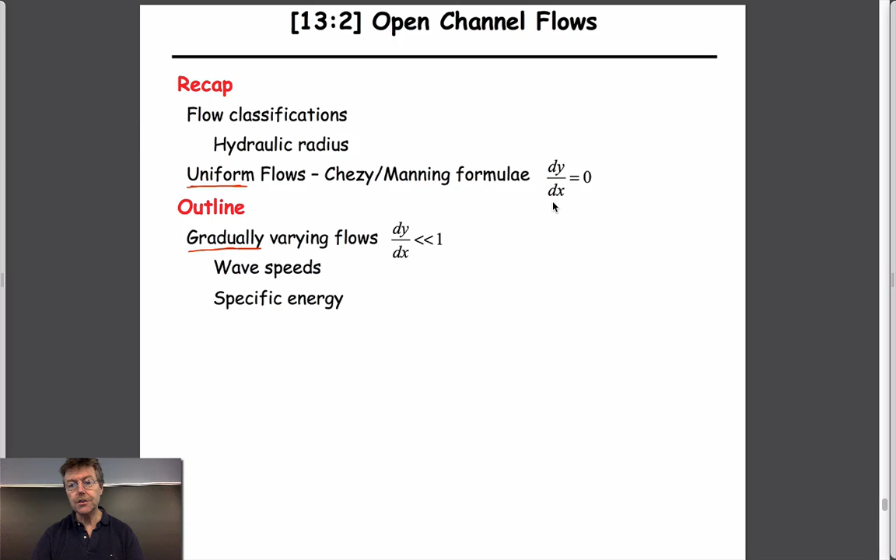And so just to summarize from last time, when we developed our behavior for uniform flows, by definition, the definition of a uniform flow is that the depth doesn't change as you go from upstream to downstream. And so we used this figure specifically to explain what was going on, and that is that if the flow is uniform, then the depth of the flow, by definition, upstream and downstream, is the same. If the depth of flow upstream and downstream is the same, then the velocity of the flow at each of these points has to be the same as well.

And so in terms of the slope of the bed, the hydraulic grade line, which is the surface of the water, and the energy grade line, which is the slope of the water plus the v squared over 2g term, they all have to be parallel to each other by definition. So this is parallel to this, which is parallel to this. And in that condition, the important consideration is that we can basically draw a box where if this is length 1 and this is S0, this is the slope by definition.

And if we go directly above like this, then if we draw this horizontal, and this is SF, and this is 1 also by length, then it means that this is the viscous loss, the energy that's being expended in the system.

Just like we can write Bernoulli between upstream and downstream, this is really Bernoulli written between upstream and downstream. This is our term which would be our equivalent for the HL term. Actually, I suppose in some respects, this is kind of equivalent to the HP term. I never actually thought about it that way, but it is.

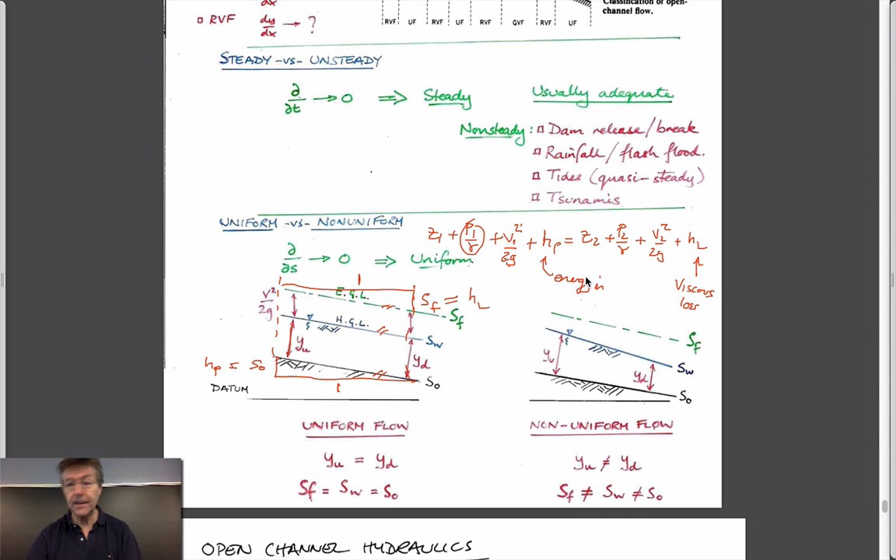This is the energy in, or maybe it's the energy rate in. And so the energy in is provided, this is basically the equivalent of S0, and this is the equivalent of SF.

So if this energy grade line was horizontal, which it can't be for the reasons we've said, then there'd be no viscous loss in the system.

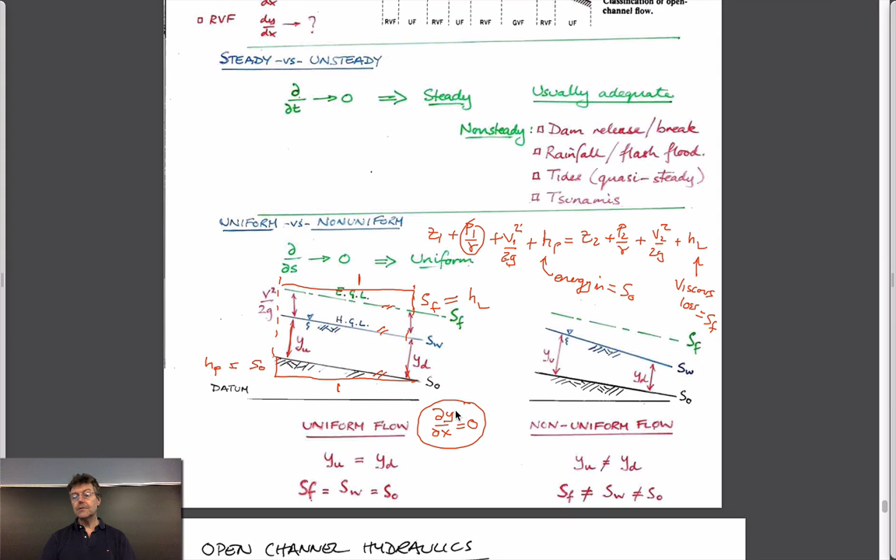So by definition, for uniform flows, where in a mathematical sense the change in depth as you go downstream is 0, that's all this term means, this is just a fancy way of saying that, then as a consequence of that we get out of it the Chézy equation or the Manning equation, which I'll just zip up in a second and write down for us.

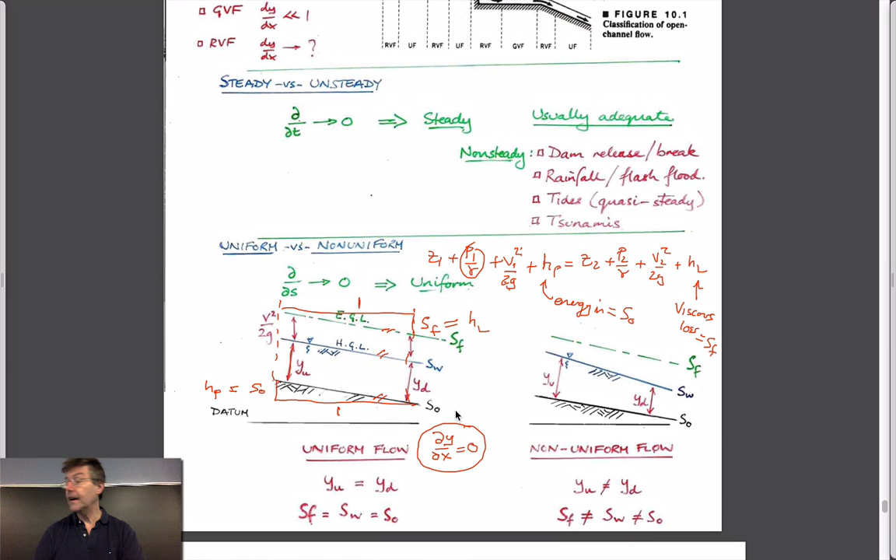And that allows us to calculate what the flow rates are within channels. And so I'll zip up.

And so if we have a channel that has some cross-section, don't know how well I can draw this. I can certainly draw it fine on its side.

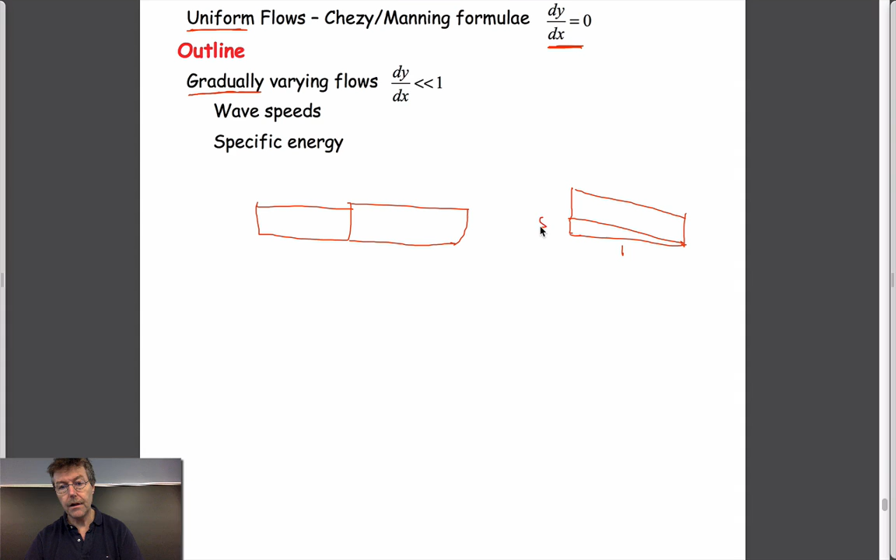And that channel has a slope S0, and it has depth y. And this is my perspective drawing of this. This is area. This is wetted perimeter, which we've drawn here.

Then we can always get the flow velocity in this as a function of this constant, which depends on, it's equal to 1 for SI. I think it's equal to 1.49 for feet per second versus meters per second. The Manning coefficient multiplied by hydraulic radius, I think to the 2/3, and multiplied by the slope of the bed to the half.

And if you want to get the volumetric flow, you just multiply the average velocity by the cross-sectional area. So hydraulic radius is equal to area over perimeter, and slope is just unitless, right? It's this length divided by 1, whatever that is.

And so typically these are very small numbers, fractions, less than 0.1, less than 0.01, less than 1 in 100. And so we rationalized this last time when we looked at the comparison, if you like, between our graphs for Reynolds number.

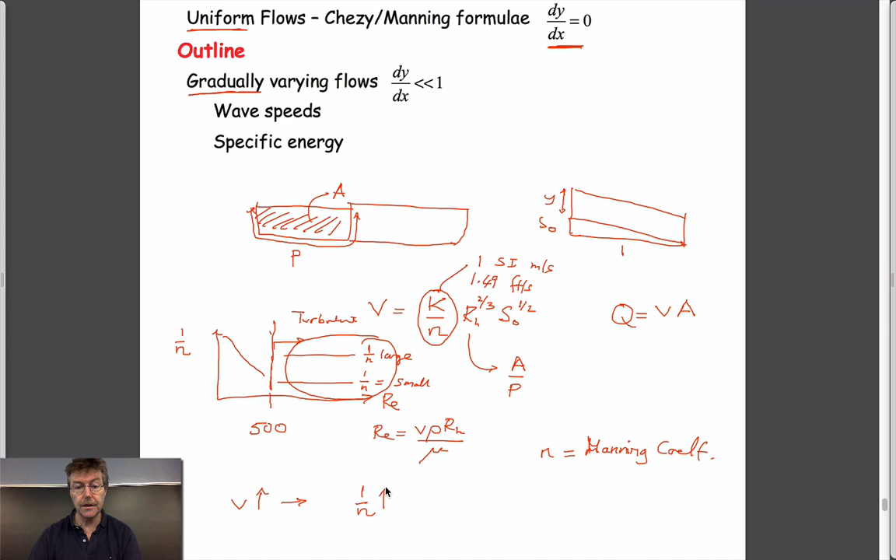So if you want velocity to be large, then what do you need to do? You either have 1 over the Manning coefficient be a big number, you have a hydraulic radius that is large, or you have a slope that is large. You can do any of those things to increase flow. Those are the design things you could do to change it.

So instead of using a rough material, you could line the channel with concrete forms to make it nice and smooth, and therefore make this number large. You could increase the slope of it, maybe, if that's within your constraints to be able to do that, and you could make it increase.

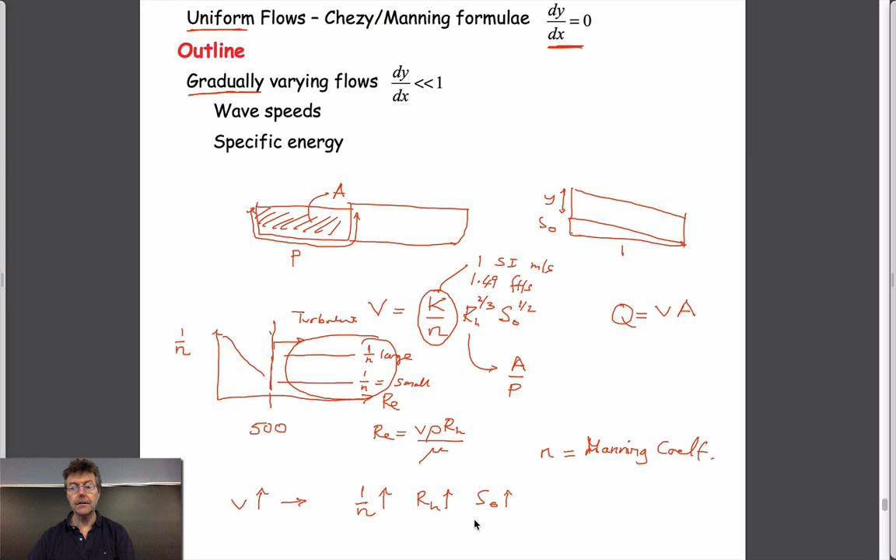Or you could change the hydraulic radius, which is equal to the area over the perimeter - you could increase the area relative to the perimeter, in other words make it a more efficient section. You can actually do calculations to figure out what the most efficient sections would be, and we could illustrate this with a circular section.

It turns out that the most efficient circular section is to basically fill the height, where the height here would be equal to the radius of this. You can imagine that if you're just filling the bottom of this channel, the perimeter is relatively large and the area you fill is not very large. As you fill this progressively higher, the area increases and the perimeter doesn't increase so much.

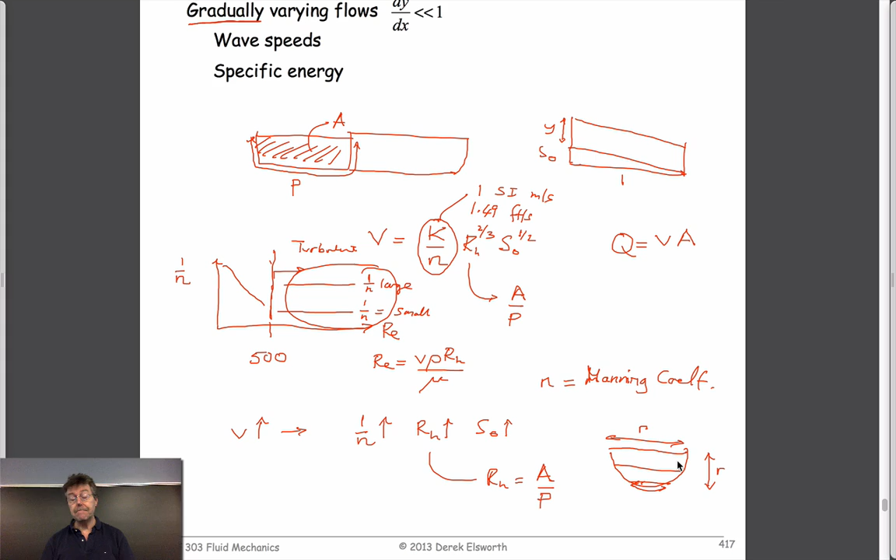So you can imagine that to get the biggest ratio of area to perimeter, you look at the most favorable section that gives you that. We didn't talk about that last time, but that was kind of a footnote on one of the figures we had.

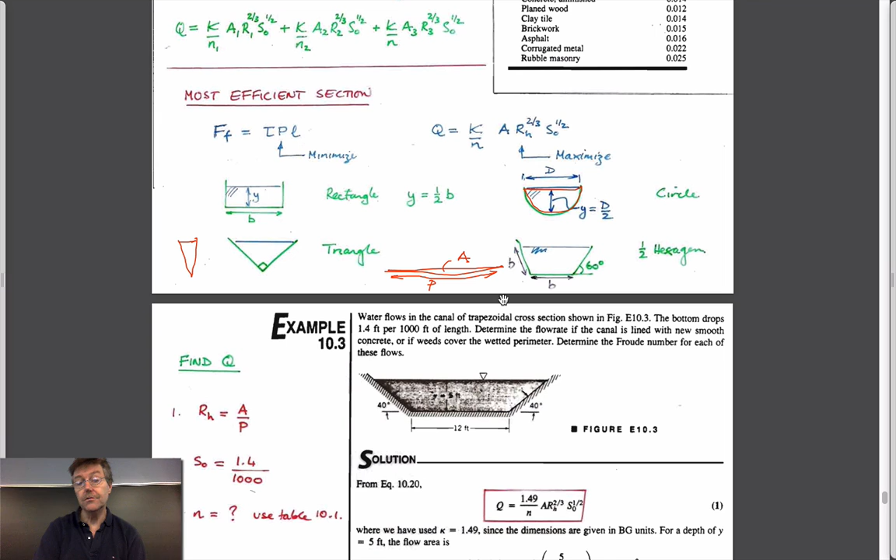And the converse of that would be if it was like this. If this was a triangle with this angle, then this area here is very small relative to this perimeter if you open up the triangle. So you can imagine that you can get those different coefficients, and get the most efficient section to do that. We won't belabor that point, but those are the controls you have to maximize the channel flow.

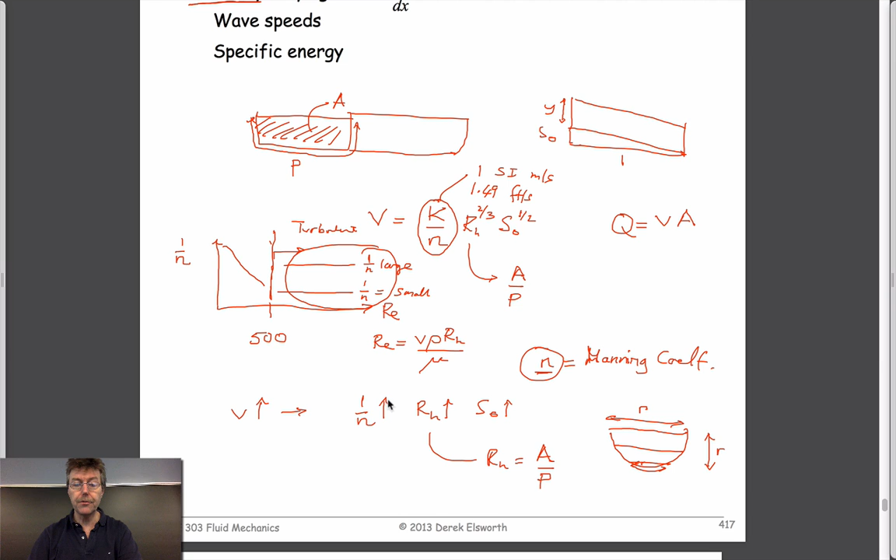So that's really where we are with the simplest of these cases - always turbulent, and therefore always depends on only a single coefficient, because this line is flat. We never draw this diagram like this, but we do know what these numbers are based on typical materials, and these are the parameters that you control to be able to do something about it. So that's what we dealt with before.

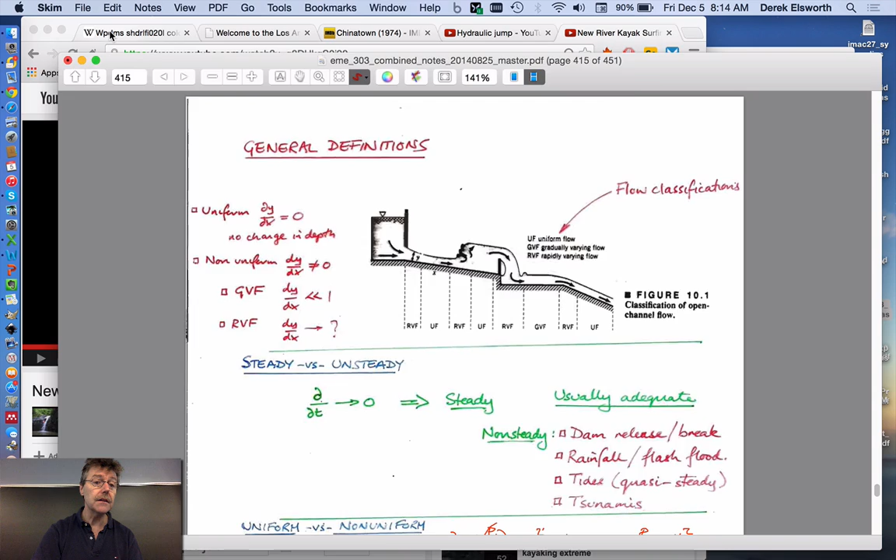So now what we'd like to do - I have something here. So this is the other thing. The obvious application of this is something like...

I guess topical now, California is in drought. It's an El Nino year, so it's about to get a dousing of water. I lived in California in the Bay Area in 1982-83, which was an El Nino year, and I remember horizontal rain all through the spring - it was the year they were actually digging out the ski lifts in the Sierras, because there was so much snow that when you got off the lift, the gantries were too low.

And so California, interestingly enough, gets most of its water from the Colorado River, which by the way, when it flows into Baja California, the Gulf of California - I guess it's off this map, the neck that goes around through Mexico, western Mexico - there's basically no water that goes into that sea now.

All of it gets taken to LA in some form through an aqueduct system. The aqueduct system is quite controversial, was at the time - Colorado water rights, water from the Colorado River, etc. And it all gets used in another state. And so it is a controversial issue, although perhaps it's in place.

If ever you've watched the movie Chinatown, it occurs to me, is all about issues over water getting into the LA water district. It's an interesting movie to watch. So just reminded of that, thinking about this.

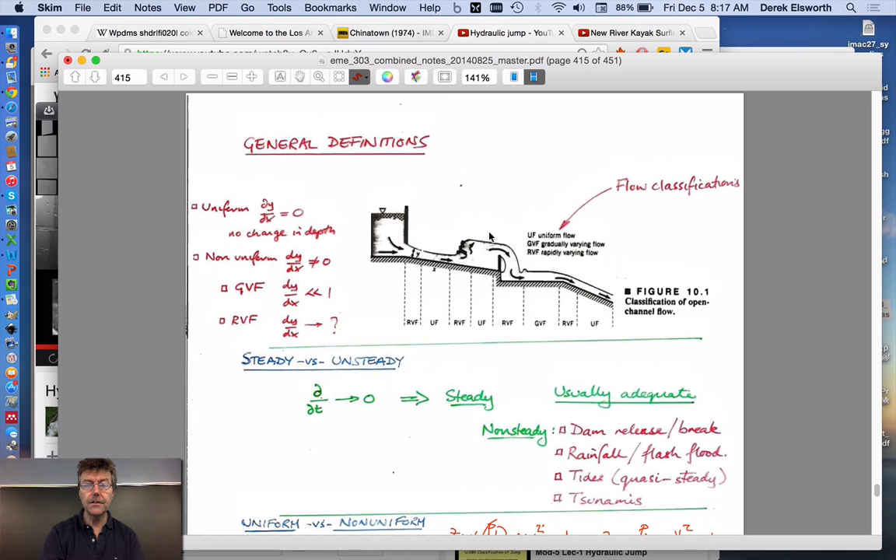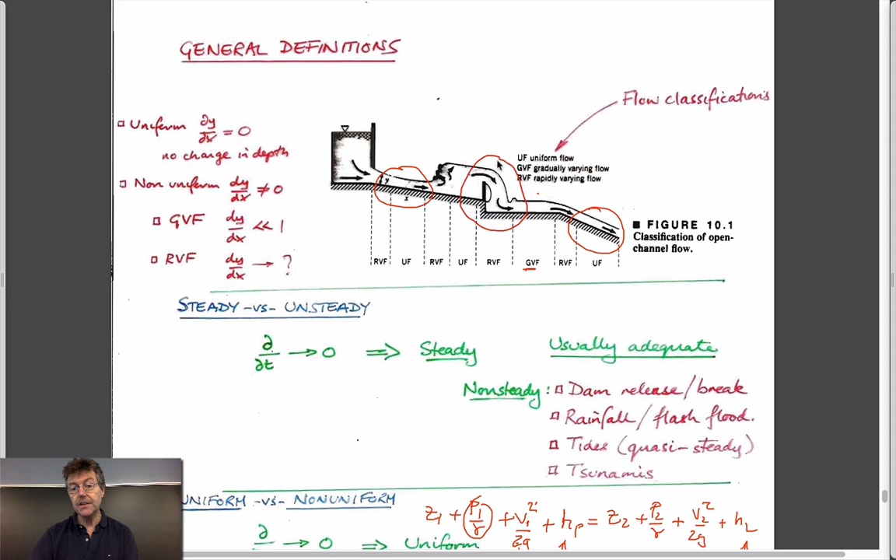And so to be able to do that, what we need to do is think about the idea of the different flow configurations that we might have within our system. And so what we've talked about so far are uniform flows, where the depth of flow doesn't change from upstream to downstream. And the two other variants are gradually varying flows, where it slowly changes from one to the other, and rapidly varying flows where the change in depth is much more extreme as you go from one to the other. And so to understand that, then we have to return to this kind of geometry.

And this geometry kind of allows us to think as to what's going on. And so the idea is that if the upstream depth and the downstream depths are different from each other, then by definition the velocities upstream and downstream also have to be different from each other. If the downstream depth is smaller, then this velocity has to be larger. If this velocity has to be larger, then this separation for the energy line, in other words, v downstream squared over 2g, has to be higher than this.

And so now, instead of the energy grade line and the hydraulic grade line and the slope of the bed all being equivalent to each other, now potentially these two are different from each other. And for the reasons we've just stated, presumably SF is not parallel to SW for sure, and there's no reason why it particularly should be parallel to S0.

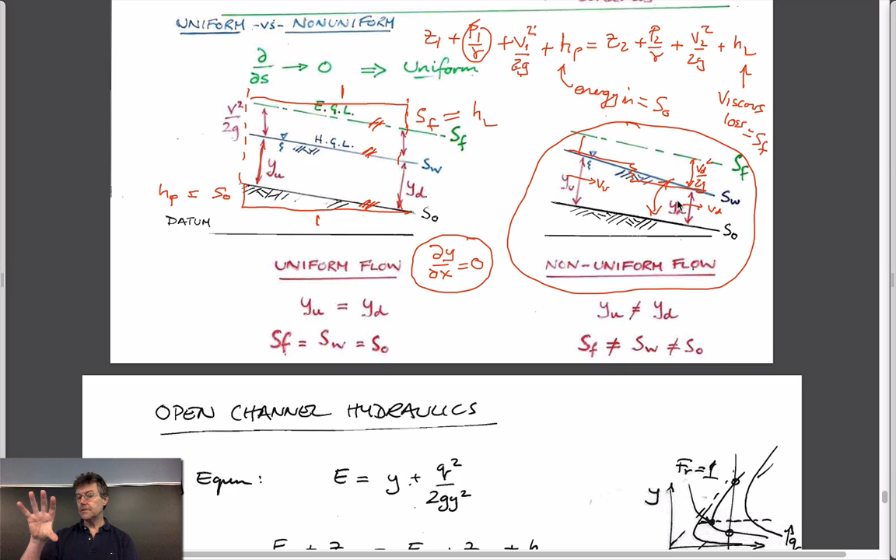And so that's the condition that we'd like to try and understand. And more importantly, we'd like to understand whether this occurs as a slope between these, which we didn't really see last time, or whether it occurs something like a step, which we saw the opposite last time, where it went from shallow to deep as it went downstream, but presumably it can do either. So what are the conditions that explain that behavior?

So we're going to now look at non-uniform flows, and specifically we'll look at gradually varying flows. I won't dwell on that, that's just my scribbles.

And so the one piece of information we now need to do this, surprisingly, is we need a wave velocity. So wave velocity for fluids flowing in channels is the equivalent of you listening to me. I feel sorry for you. But the rate at which my voice gets to you is by the acoustic velocity of speed of sound in air. And wave velocities in water are similar, but they fall into a variety of categories.

They're different in open channel flow than they are in closed channel flow, which is in this room. This is a fluid mechanics problem. We're sitting in a fluid, happens to be a gas, and you're listening to me, and the rate at which my voice gets to you is actually given by the speed of sound, which is equal to the bulk modulus of the air divided by density, square root.

If you cast your minds back, we talked about this basically 14 weeks ago. It's this expression here. So if you know the modulus of wood or steel, and you know its density, you can calculate what the speed of sound would be in a bar or in the rock.

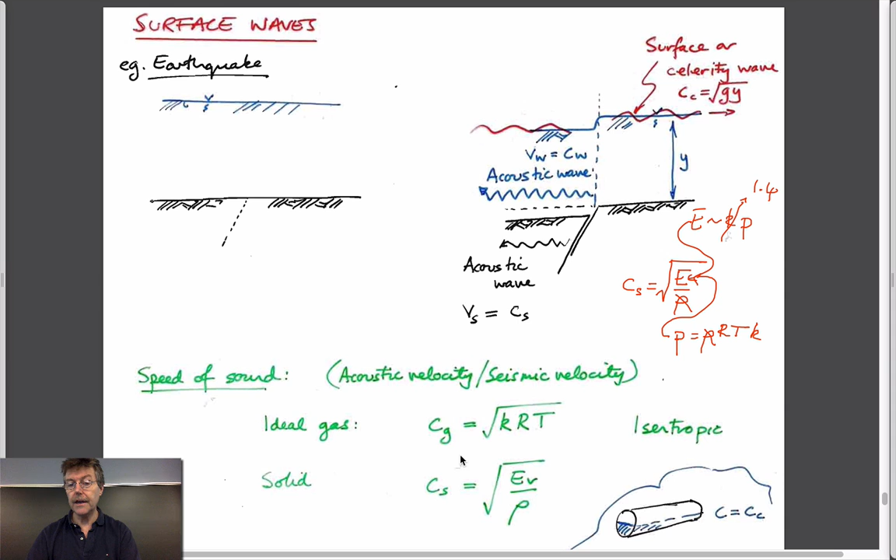But if we substitute this into here, and we know that the pressure is equal, from the ideal gas law, to RT, or KRT, and we substitute that in for this, then we lose both of these, and we end up with the speed of sound in air being equal to the ideal gas constant, the temperature, and this coefficient. So it doesn't matter - the bottom line is we can calculate the speed of sound in air if we know those coefficients. It's no different from the speed of sound for the P wave in a solid.

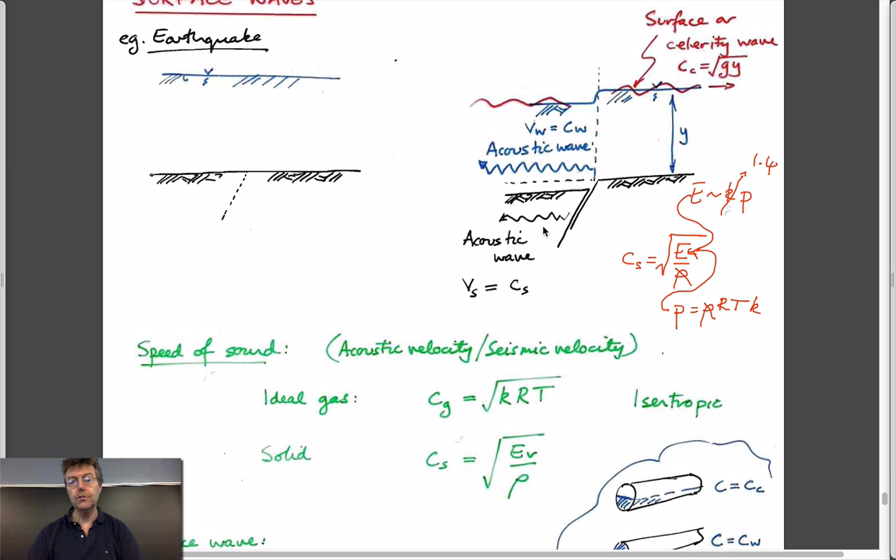And I think we talked about this at the time. So if you have an earthquake offshore, the speed at which the seismic signal arrives on land - the earthquake arriving in eastern Japan from being offshore - is controlled by this seismic velocity, acoustic velocity. For rocks, it's of the order of a couple of kilometers to 5 kilometers a second. So if you are 100 kilometers offshore and it's traveling at 2 kilometers a second, does that mean you have 40 seconds before the shock arrives on shore?

You can measure it offshore with ocean bottom seismometers. You send that signal electrically at the speed of light. Onshore, you get 40 seconds warning to turn off the gas, get out of your building, and be safe. So there are some benefits, and those things are put in place, actually, in Japan and also in California.

Automatic shutoffs for gas. Speed of sound in air - you can do the same calculation. It's much slower, about 400 meters a second, something like 600 miles an hour.

If you look at the celerity wave - we could derive it, but I'm not going to derive it - the celerity wave is different from the acoustic wave. In other words, if someone shouts here to someone at the bottom of the sea, the rate at which that will travel to you is the speed of sound in water, which depends - we could calculate it, I guess, based on this.

The stiffness of water is about 2 GPa, so it's about the same as rock. The speed of sound in water, I think, is about 1,000 or 1,500 meters a second - slower than rock, but faster than air.

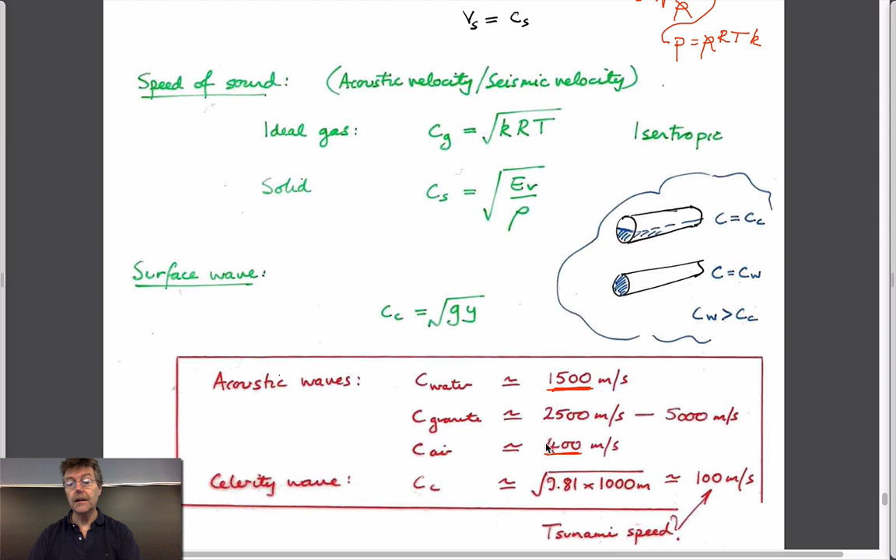But that's when we're talking about the wave speed for surface waves, then they're different. It's not the same as the compressional wave that arises from a sonar pulse, by doing a ping, for instance, and seeing what it bounces off, or shouting at someone if you're diving, if you can shout underwater.

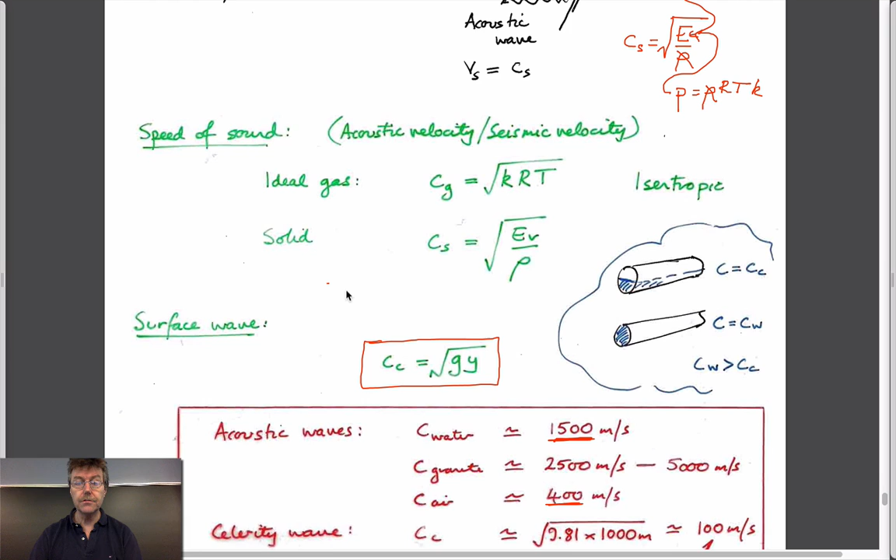It's the speed of travel of a celerity wave. We never derived it, and I don't think I'll derive it today, but the celerity wave speed is this. It's proportional to two things: it's proportional to what planet you're on - gravity on this planet is 9.8 meters a second squared - and it's proportional to the depth of the water. So in other words, in this case, this is the depth of the water, and this is the so-called shallow wave approximation.

And it's the only one we'll use. It turns out that if you could calculate it, it's a function of depth. So if you're 1,000 meters deep, water depth multiplied by 10 meters a second squared is 10 to the 4, square root of 10 to the 4. So cc is about square root of 10 to the 4, which is about 100 meters a second. And so if you're in 1,000 meters of water, you can calculate what that is.

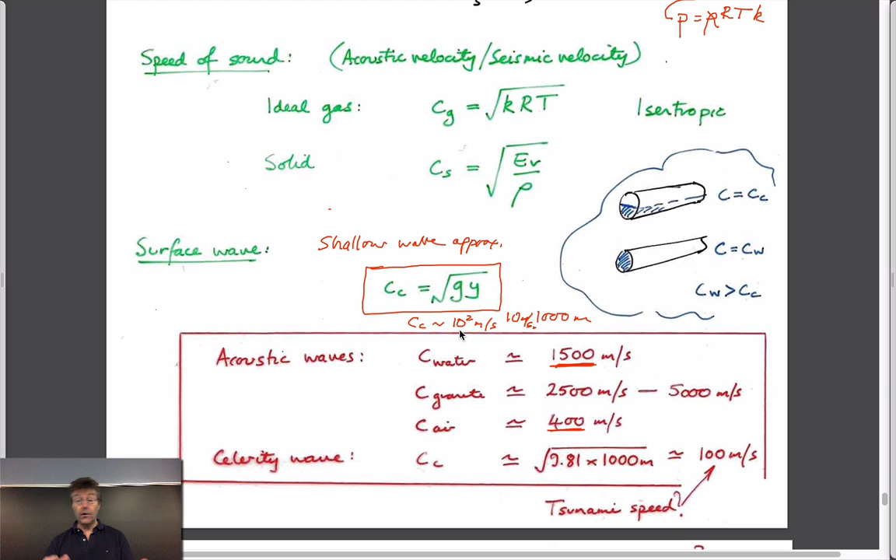And so 100 meters a second is actually the speed that a tsunami will travel at. So quite fast, really fast actually. It's of the order of the speed of a plane. So much faster than you think.

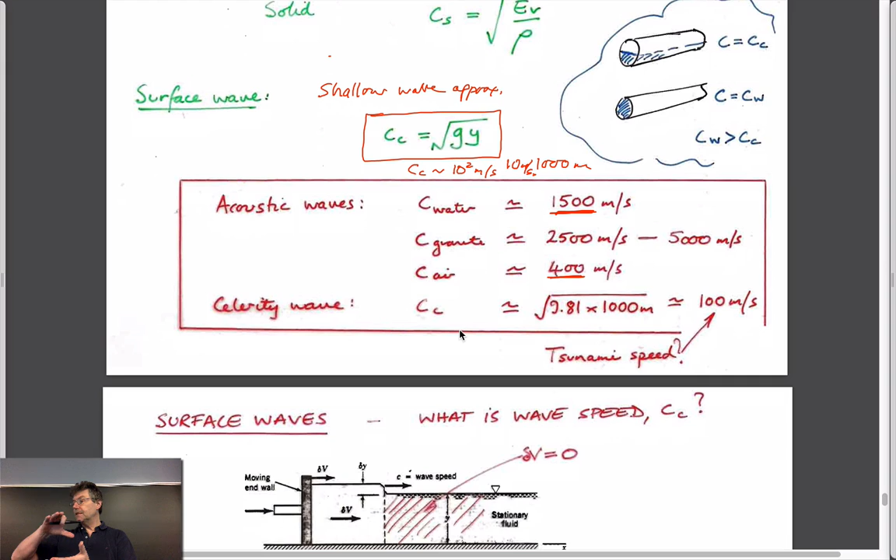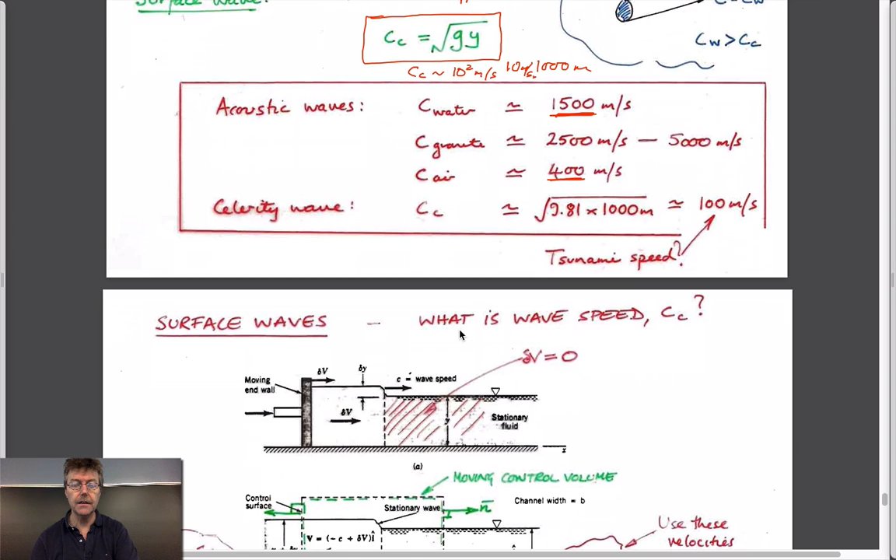Of course, when you're way offshore, when it's quite deep, the size of a tsunami is probably only a few centimeters. It's only when it runs up onto the shore that the depth gets constricted, then the water piles up and it becomes a big event. But basically, offshore it's a very, very small amount.

So we could do the derivation for that, but we won't. We will make the final comment, and that is that this shallow wave approximation is going to be good enough for us. And it is that the speed of the wave is controlled by the depth of the water and g.

This responds to the fact that relative to the wavelength of the wave offshore - and by the way, the wavelength of tsunamis offshore is perhaps a kilometer or many kilometers, the wavelength being the distance between peaks - for a shallow wave, by definition, the depth of the water relative to the wavelength is small. So y is small relative to the wavelength.

For deep waves, it's the same deal. The wavelength, if it's the same wavelength here, as you'd expect, refers to this. So it's relative to the wavelength - the wavelength of the wave relative to the depth of the water.

And so it turns out that if you look at very deep waters, the deepest points on Earth are probably 8-9 kilometers deep, the Marianas Trench maybe 12 kilometers deep, where the wavelengths are small compared to very deep depths. Then this no longer holds, and the deep water wave approximation is this.

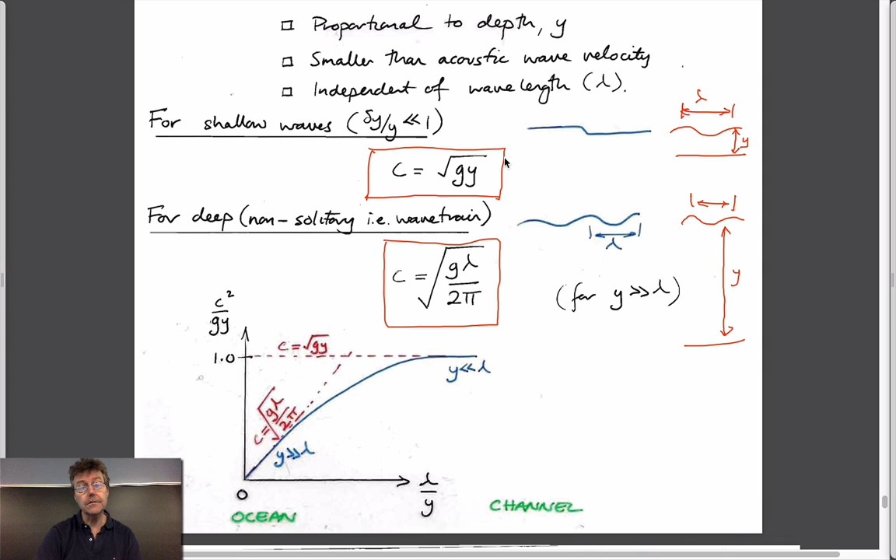So why on earth, when we're talking about channel flow, would we worry about the speed of a wave traveling in a system? Good question. So the idea is this.

If you cast your mind back to when we talked about our three most important and favorite dimensionless parameters, we talked about Reynolds number, which is the ratio of inertial to viscous forces. We talked about Euler number, which is, just to remind you, change in pressure over rho v squared - again, it's our jet engine at SFO pushing the truck into the water.

And this is pressure force divided by inertial force, and Froude number, which is our inertial force divided by gravitational force. We haven't used this very much so far, but you remember by our definition, it was velocity divided by square root of gy. This square root of gy is, of course, we now know, the celerity wave speed.

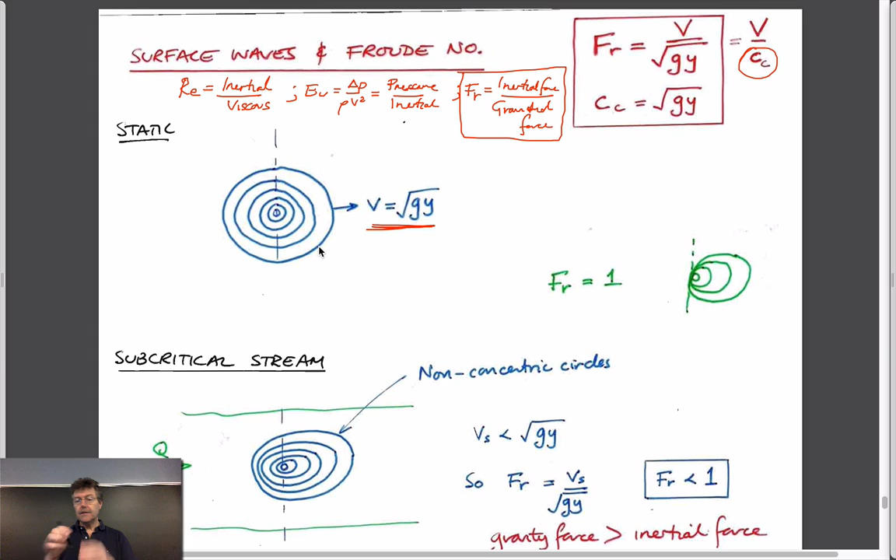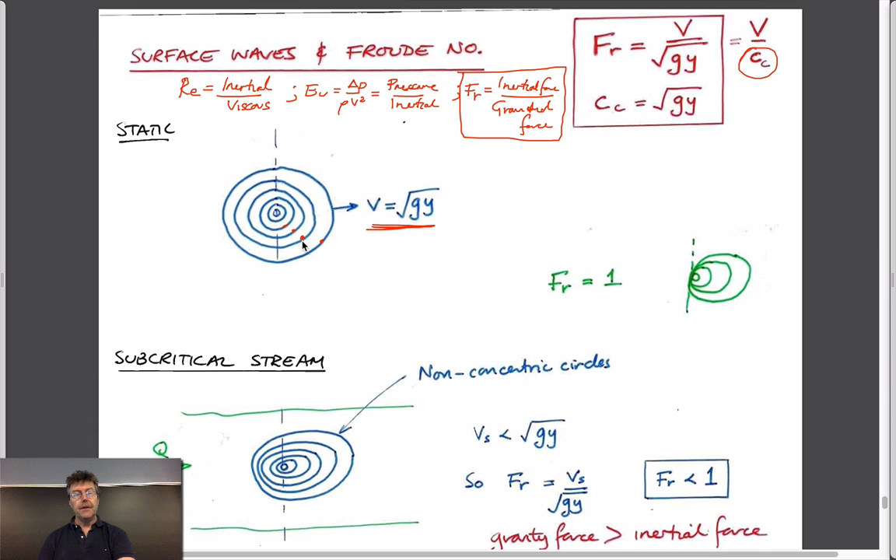And so if you're looking down on it, what you'll see, if it was only a single wave, is if you take a picture at T1, T2, T3, T4, T5, there'll be all these concentric circles if you used a strobe, for instance, to do it. But if the water is flowing, you'd get a slightly different picture. If you do the same thing with a strobe after you drop a pebble in at time t0, if the water is flowing, it would look like a whole series - these would be circles, they wouldn't be ellipses, they'd be a bunch of circles.

So if I redraw that, here is where you drop it in. At time 0, you drop it in at this point here. In the time it takes for this wave to develop around that circle, of course, the upstream part has flowed an amount downstream.

This part has flowed in an equal amount, so it will just have translated. What you'll see is a whole series of non-concentric circles that would be slightly shifted.

In this case, the flow velocity of this stream is less than the wave speed. If it was exactly equal to the wave speed, then this would be moving down exactly to this point in the time it took for the wave to go out. So if the flow velocity here was equal to the wave speed, square root of gy, it would look like a whole series of concentric circles that impinge on this point.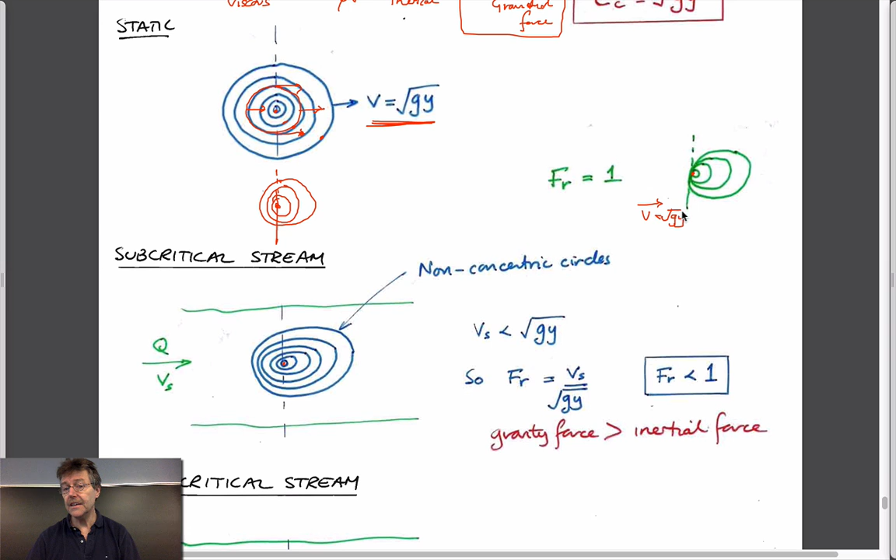That's exactly a Froude number of 1. If you go above that velocity, the picture you'd get would be this turned inside out. You drop it in here, but this expanding circle would already have traveled downstream beyond the point where it could reach this.

The relevance of this is, if I'm talking to you and I'm sitting here, you can hear me. If I'm talking to you but moving out of the room at the speed of sound, you'll just not hear me. And if I'm moving faster than the speed of sound away from you, you don't have a chance of ever hearing me, because the noise I make will never reach you.

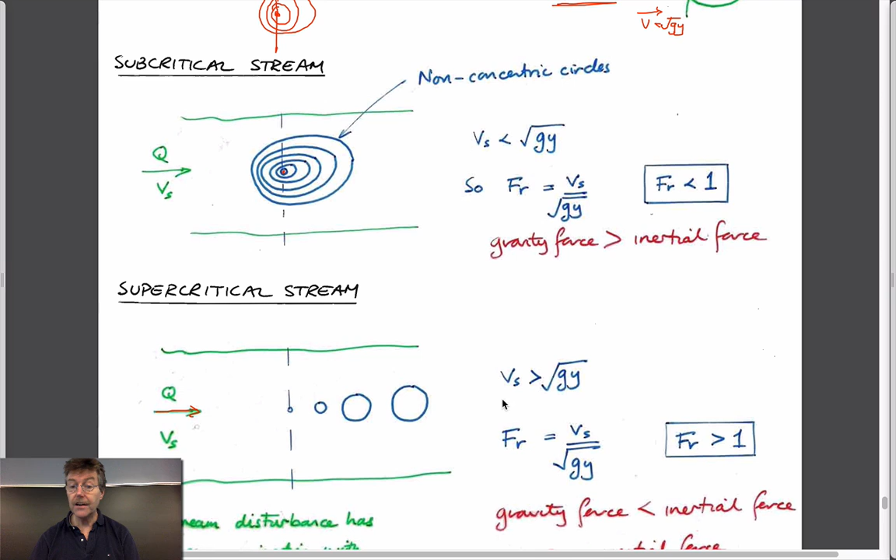The relevance here is the same. If the flow velocity downstream is faster than the celerity wave speed, there's no way a disturbance downstream can communicate its effect in any way to anything upstream. So that's the relevance of the Froude number.

This is the break at a Froude number of 1, where it is just communicating. If it's less than 1, dipping something in the water will communicate that information upstream to some point. If the Froude number of the flow is greater than 1, it can never communicate any information from downstream to upstream.

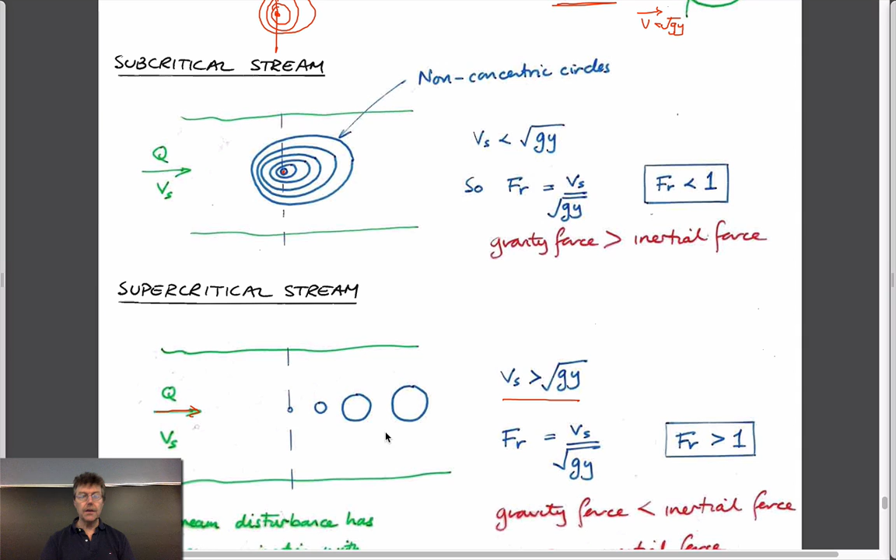That's relevant because when we look at these systems and this behavior, you could think of it in those terms. Something here is going on downstream, something is going on upstream, and for some reason they don't seem able to communicate. It's because they can't communicate that it's happy to stay in this configuration, downstream deep and flowing slowly versus upstream flowing fast.

That's the rationale for why we'd look at wave speeds, celerity wave speeds in water, to be able to define that behavior. Okay, taking too long to do this.

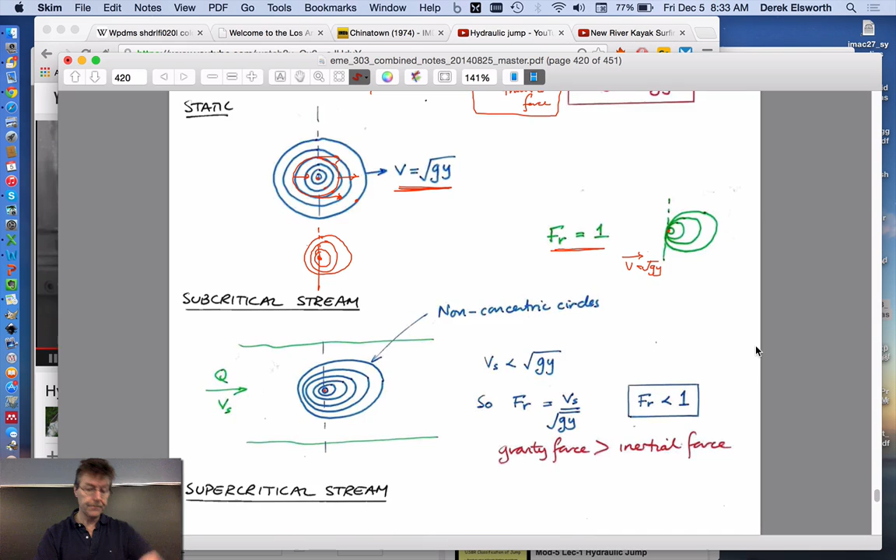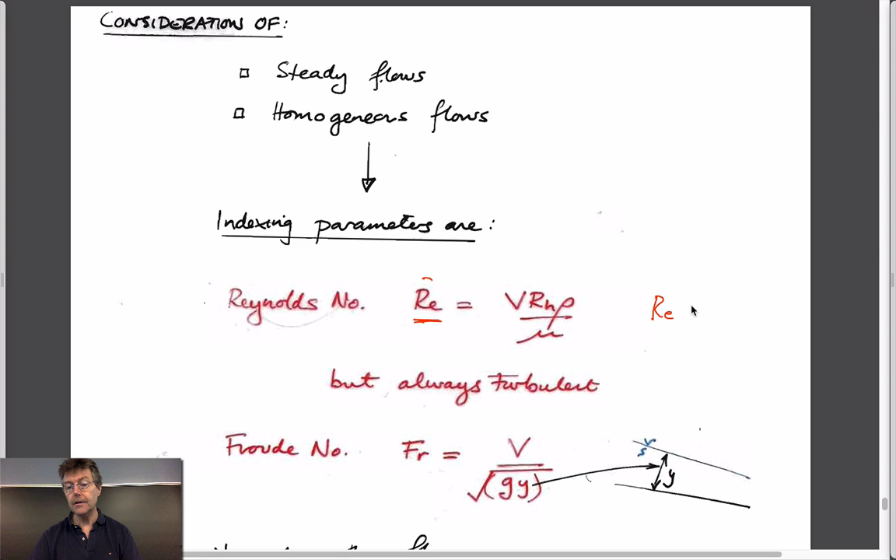Bottom line, we'd like to use this to understand these behaviors. We already know that in open channel flows, all our behavior is turbulent, so Reynolds number might not be a very good indexing parameter, because we know we're always going to be greater than whatever we said was a Reynolds number greater than 500.

So now the Froude number becomes an important parameter to use. If we have a flow with the same volumetric flow going in each case, we can use the Froude number to index the kind of flow we have: whether we have what's called supercritical flow, above a critical velocity, where the Froude number is bigger than 1, which can't communicate upstream, with a fast flow rate in a very shallow flow depth.

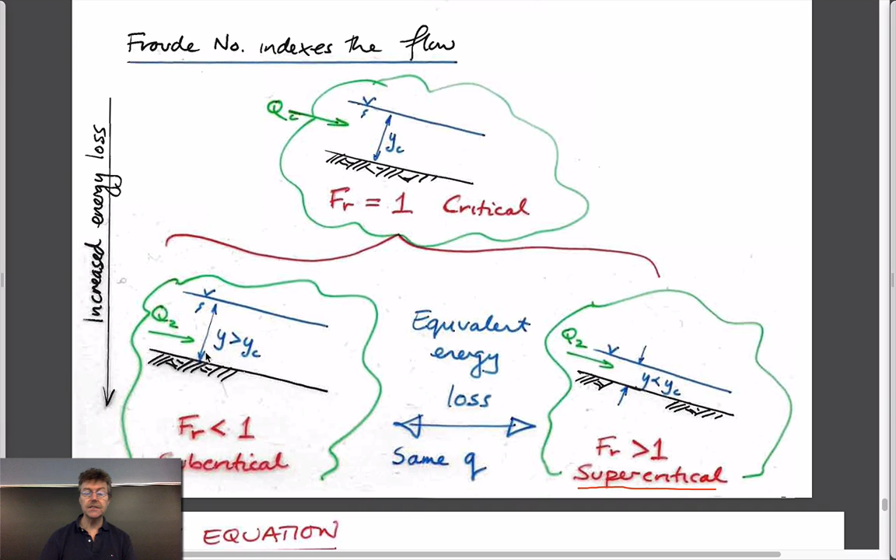Or an equivalent volumetric flow that gives a lower flow velocity and a relatively deeper depth. That's the understanding we need in order to see how flows may self-organize in this particular way.

So that's our challenge. To address it, we go back to Bernoulli, and we idealize our behavior not differently from what we've looked at already: a channel with a slope of the base of 1 over S0, an upstream depth and a downstream depth. Because the downstream depth is shallower than the upstream depth and the same volumetric flow is occurring, the velocity V2 here has to be larger than V1 by definition, right?

And if V2 is bigger than V1, then this length here has to be bigger than this length here. And so that defines the bed slope, defines part of our system. On top of this, we have the height of water between upstream and downstream that defines the hydraulic grade line, HGL, on the top. The velocities predefined by a constant flow rate prescribe a lower velocity upstream than downstream because it's squeezing through a smaller gap. And so that gives the height of this energy grade line, EGL.

We're interested mainly in the slope of this, which we'll call SF. But as we said before, really it's like Bernoulli's equation, it's just HL. If this number is 1, then this is a length which is HL. HL is basically equivalent to HL equals SF times L, if this length is L. So the units of head loss are length, the units of slope are length divided by length, so they're dimensionless, but if you multiply a dimensionless number by a number with units of length, you end up with the right units.

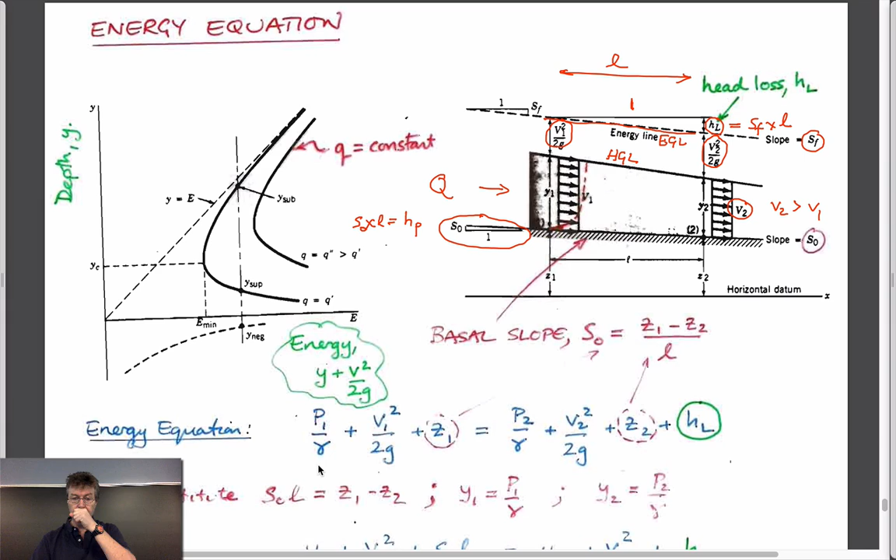Okay, I digress. So, with this defined as our system, we can write Bernoulli's equation: pressure head, velocity head, elevation head upstream; pressure head, velocity head, elevation head downstream; and head loss within our system.

What we'd like to do then is be able to rearrange it in terms of certain components. Let's make this equal to Z1 minus Z2. I guess it could be HP if we had it in there, but really we have gravity driving flow, so it's not HP. So what we're going to do is take these two values here for Z2, and we're going to note that we could replace them by this term here, which is the same as what we've written up here.

What else? We're going to realize that if you look at the magnitude of this height here, relative to this, it's just the pressure at point 2 divided by the unit weight of water. The pressure we get here would just be the height of water above us if we're sitting on the bottom of the channel. And so what we can do is we can substitute this as y1, and we can substitute this as y2 - so these are two terms here. And if we make those two substitutions, we end up with this expression here.

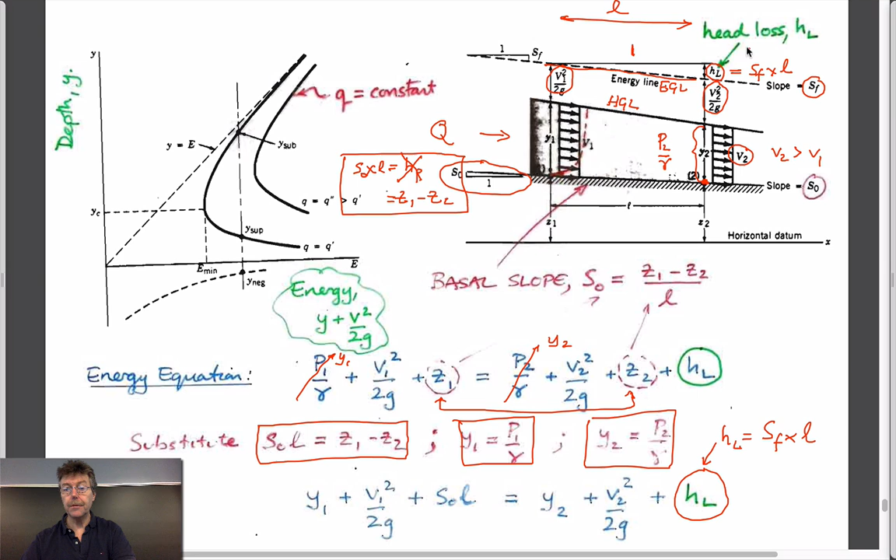We want to be able to define this head loss term. We've already said what it is: if HL is equal to SF times L, which is really just what we've written up here. Then if we make the substitutions for Z1 minus Z2, which we've already done here, and we make the substitution now for this, and gather terms, then this is the term that comes out of it - the difference between these two components.

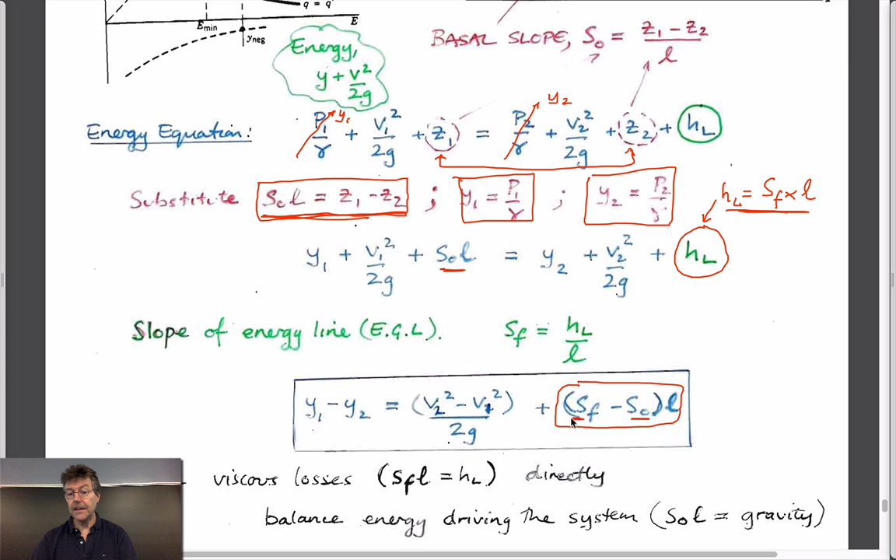And so now we have Bernoulli's equation, which includes viscous losses, so it's kind of the energy equation, the one-dimensional energy equation. It's written in terms of depths of flows, in terms of velocities upstream and downstream, and in terms of the slope of the bed and the slope of the energy grade line in the system. If the slope of the energy grade line is 0 and the slope of the bed is 0, then we lose these terms and we're just left with the Bernoulli term.

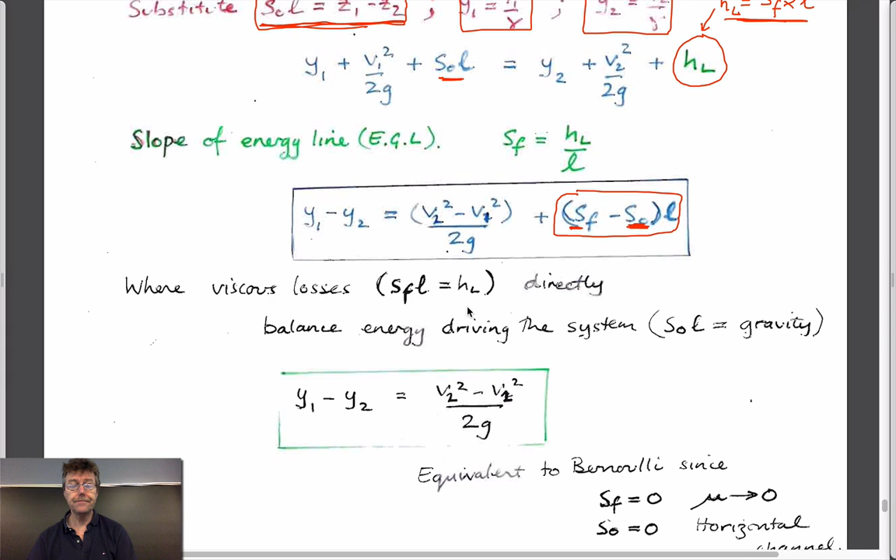All right, so this is the equation that we have. Let's not worry about dropping any of the terms. So right now it includes Bernoulli. It includes the driving gradient, which is this, which is just Z1 minus Z2, modified in some way. And it includes the viscous losses, which is really the HL term.

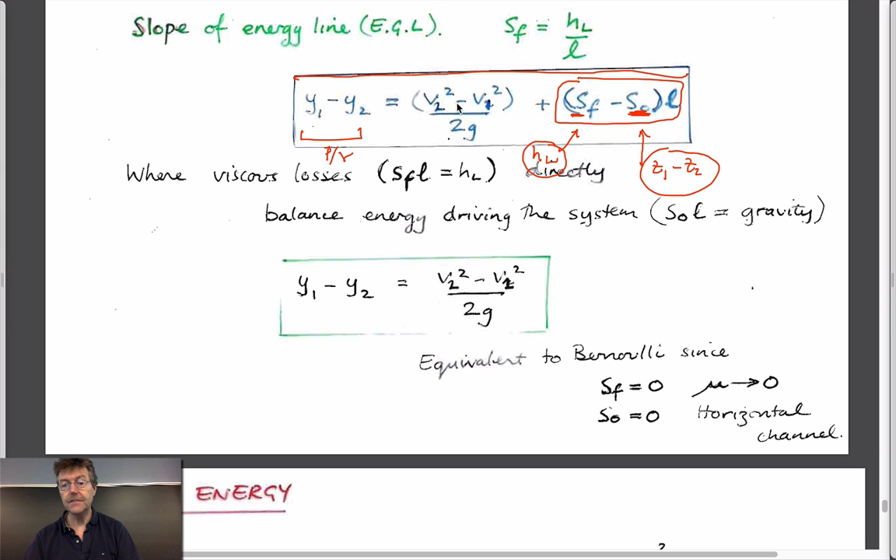So that's what these two terms are. And the rest is just the pressure term. This is pressure, and this is V squared over 2G. Okay, so why are we doing this?

Well, the other thing we can do is take this same equation, unadulterated, and rewrite it between the upstream portions. We could write y1, which is this term, and take the velocity term here, and write that as equal to the y2 term, taking this down here, plus v2 squared over 2g, plus the slope of the energy line minus the slope of the bottom surface, the bed of the river, multiplied by the length over which we measure it.

And so what we've done is come up with two terms, and we'll call these specific energy - specific energy upstream and specific energy downstream. That's what this term is here.

And that's convenient for us because now what we can do is, since it includes terms which are part of the flow regime - these are kind of abstract terms. This is a design parameter, slope of the bed. This is the energy grade line, which is kind of an abstract parameter we can't really put a number on very easily. But these are two very physical quantities - it's going to be the depth of flow upstream and how quickly it's going, and the depth of flow downstream and how quickly it's going downstream.

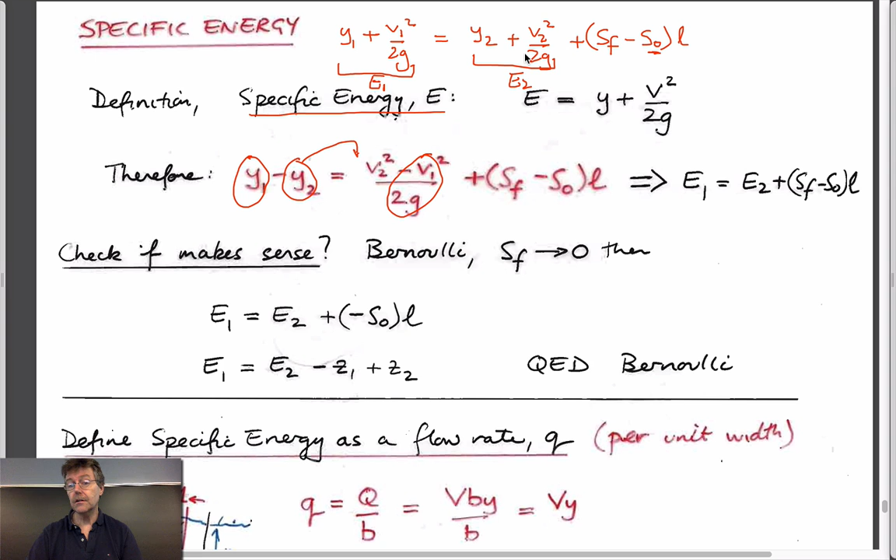So what we could do is try linking them. And if we try and link those, we take a channel which has some width b and some depth y and has some flow rate going on it. And what we define is a flow rate per unit width, and we'll call that lowercase q. So flow rate per unit width is, take a 1 meter wide portion of the channel and how much flow goes through that. You take the total flow, divide by b, and that's what gives you this.

So total flow rate, this is going to be in meters cubed per second. This is in meters. And this is going to be meters squared per second. If we know that the total flow rate is going to be the velocity times the width times the depth, this term here is obviously just cross-sectional area, then the b's top and bottom cross out, and it's just given by the velocity times the depth.

And so if we come back to our definition of specific energy as depth plus the Bernoulli term, what we could do is just multiply this term by 1, which is this here. And if we multiply this by 1, then this term on the top is just equal to v times y, all squared. And we've just said that v times y is equal to q, and so this is equal to q squared.

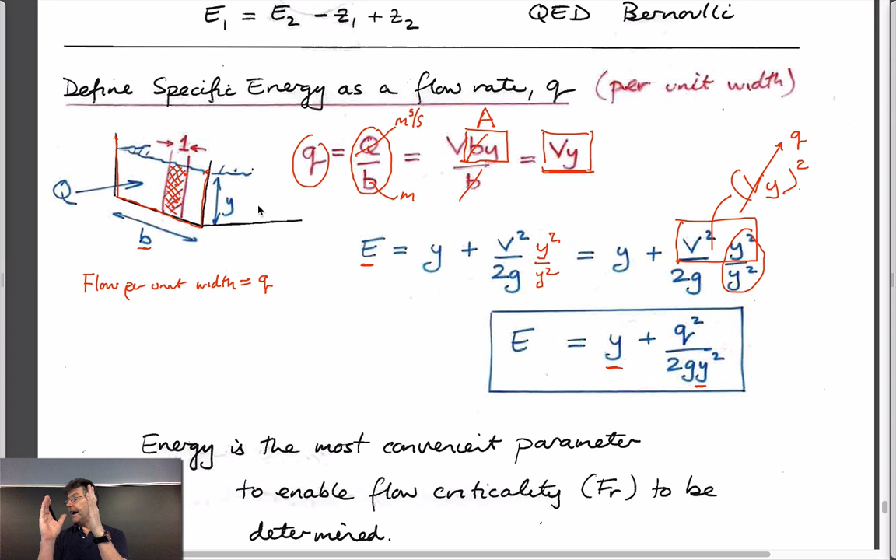And so now we have a specific energy term which is a function of the depth of flow, wherever we are, upstream or downstream, and it's a function of the flow rate per unit width, which is not going to change as you go from upstream to downstream. If you have a deep flow here and a shallow flow downstream, the flow rate per unit width, total flow in the channel is the same. As long as the channel doesn't get narrower by changing B, then the flow rate per unit width is always going to be the same. So this is going to be something that won't change as we go downstream.

So now what can we do? This does have a purpose, by the way, so don't think we're going nowhere - you may think we're going nowhere. So this is our expression, defined as we wanted to: flow rate per unit width, gravity, channel flow depth, channel flow depth.

If we set this equal to 0, then we get an equation that looks like this. We set it to 0 by multiplying by y squared. So in other words, if we multiply this by y squared, this becomes y cubed, and this becomes y squared, and then this is the expression. We set it equal to 0.

The reason for doing that is now we have an expression that only has y squared, y cubed, doesn't have y to the 1, but it has y to the 0 in it. So this is clearly a cubic equation. We know that a cubic equation has 3 roots, and so if we plot energy versus y, the two terms of this equation on some plot, then we'll get a curve like this.

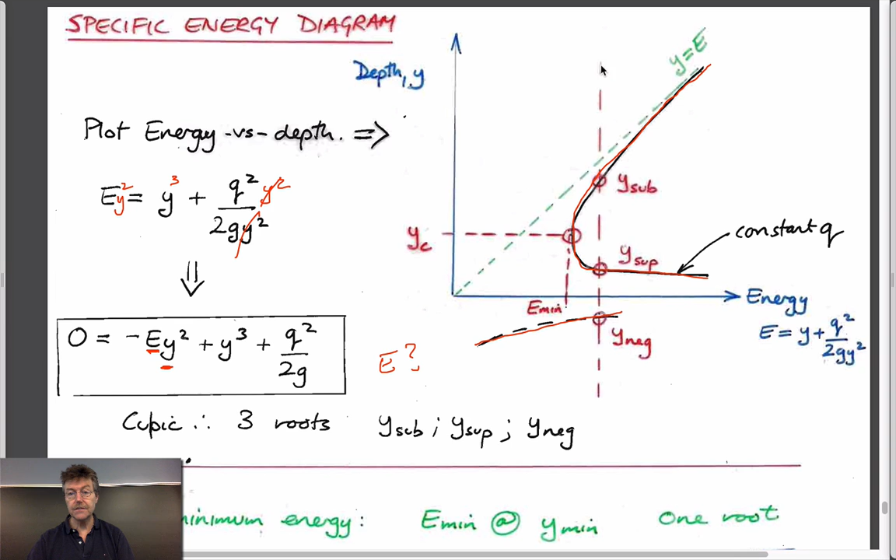3 roots mean that for any specific value of energy, which is this dashed line here, there'll be 3 values: this root here, this root here, and this one, which is a negative depth. This is depth, this is energy. This is a depth of a positive depth, this is a negative depth. Don't know what a negative depth is, it's an unreal number, so we don't care about this.

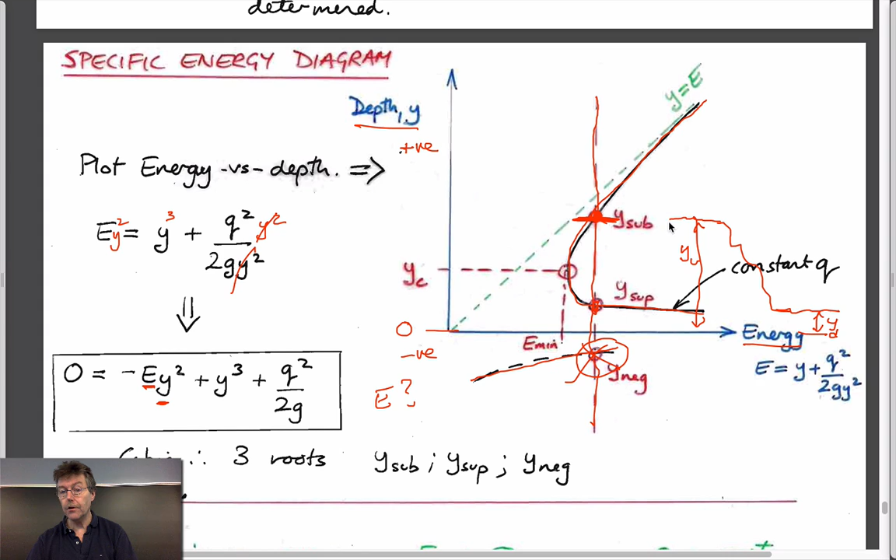But we do care about these other roots, because what these roots represent, basically, if we drew this - this is our reverse hydraulic jump. This is the depth of flow upstream, this is the depth of flow downstream. It's backwards from our hydraulic jump, which was shallow upstream, deep downstream. And this physical height here, this depth of flow, is basically the height of flow that we have here.

These represent the two potential configurations that the flow can be in. It can either be flowing very slowly at a very deep configuration, or flowing very quickly at a much shallower configuration. Each of these flows have the same energy associated with them, they're equivalent to each other, the energy losses are the same in each. That is basically the behavior we have in writing the Bernoulli equation that includes the energy terms, which is really the one-dimensional energy equation.

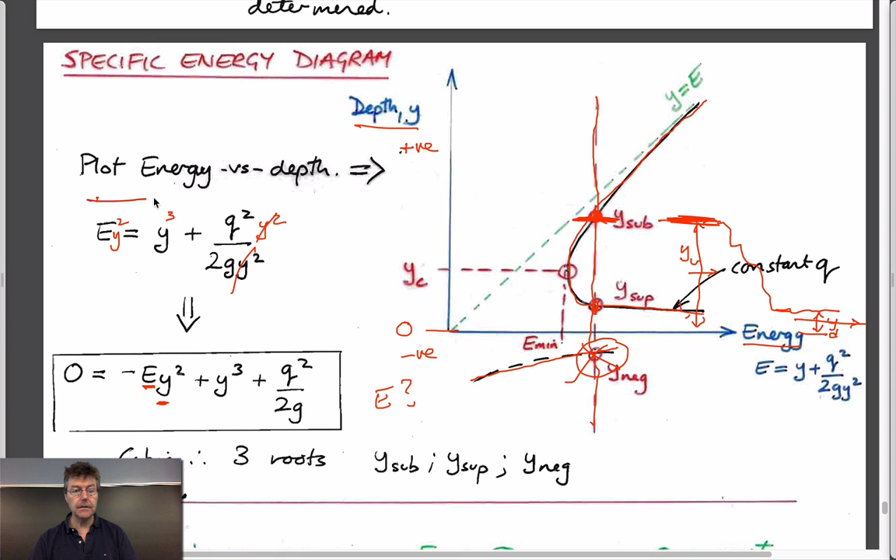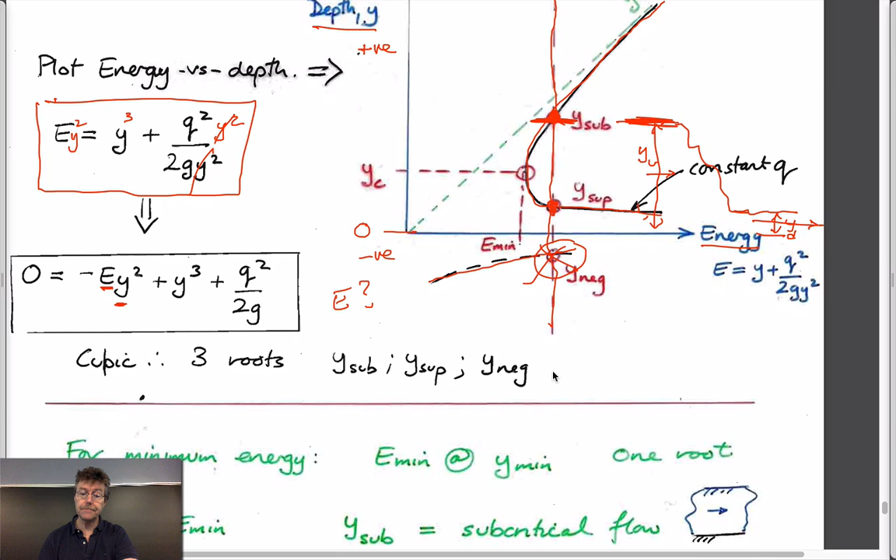We write it in a slightly different form to get something we call specific energy. We note that the energy from the upstream and downstream should be the same, and this gives us a rational way of figuring out exactly what the two potential depths would be. A bit complicated, but nonetheless, this explains the fact that we could get one flow, but we have two ambiguous depths to it - it could choose either one.

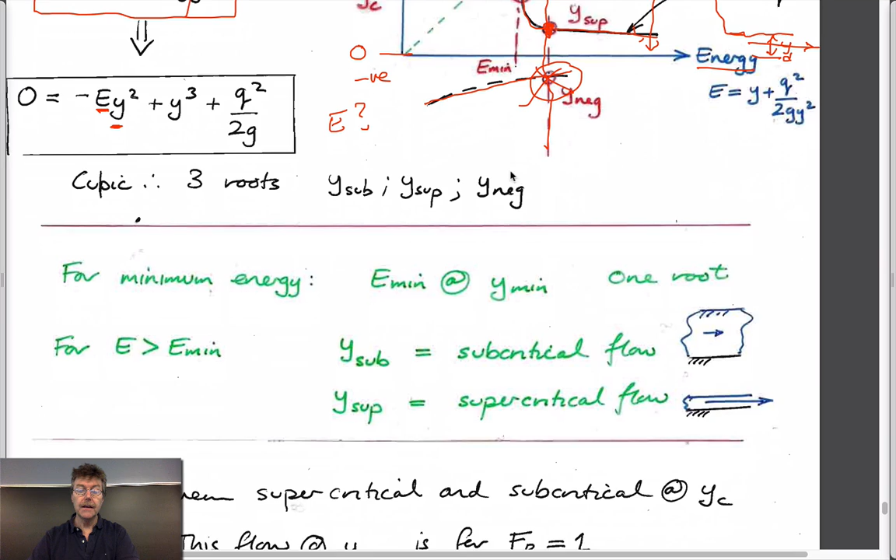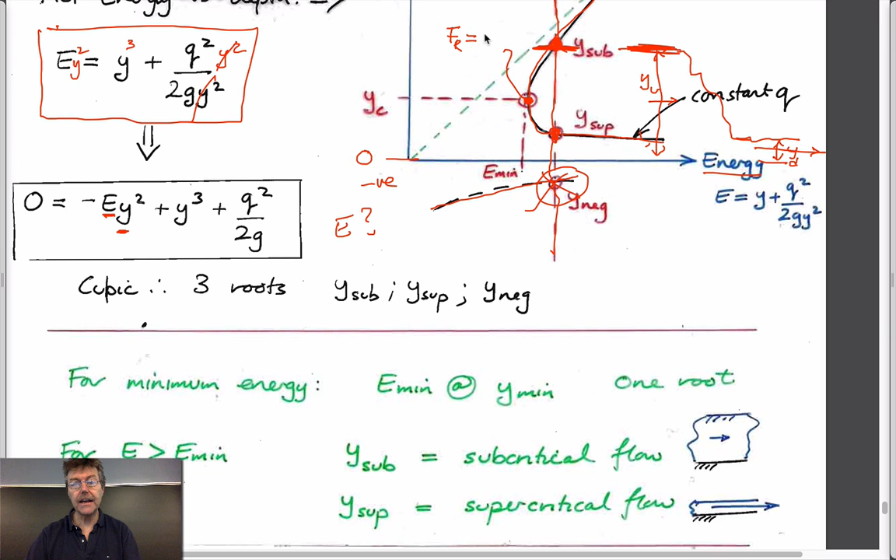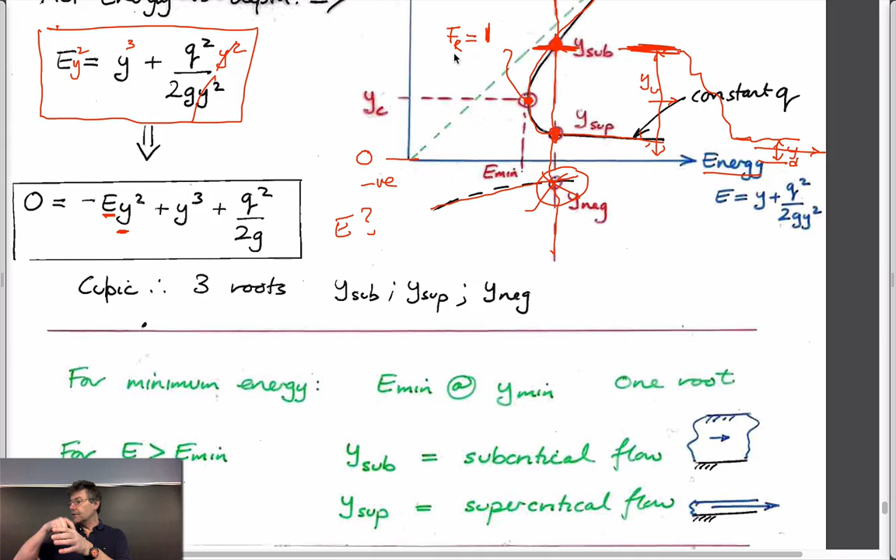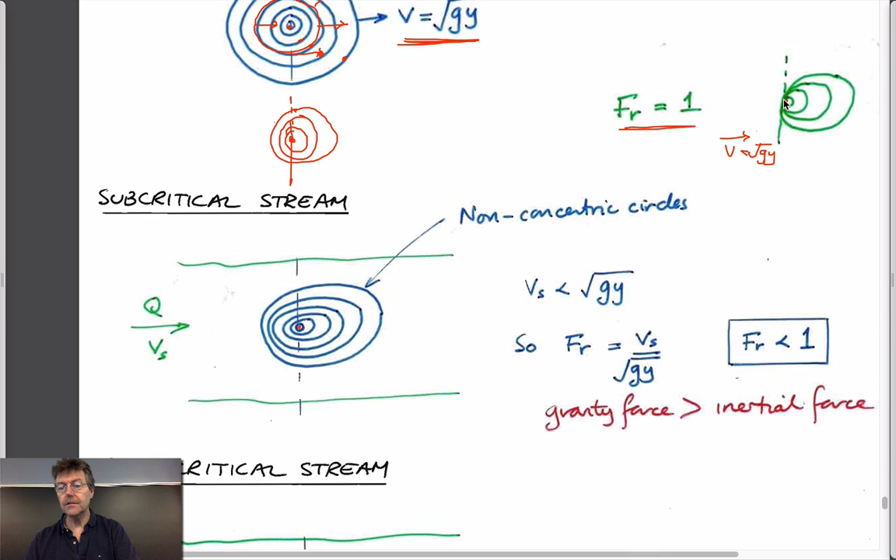The other point, which I won't belabor, is we can also find the coordinates of this. It turns out that at this point here, at the nose, the tip of this nose, the Froude number is exactly equal to 1, interesting enough. This is the idea of being able to communicate upstream - where the ripples in the channel aren't concentric circles, but they're all concentric on this physical point. If I zip up here, it's this condition, where the flow downstream is exactly at the same velocity as the communicating celerity wave going upstream.

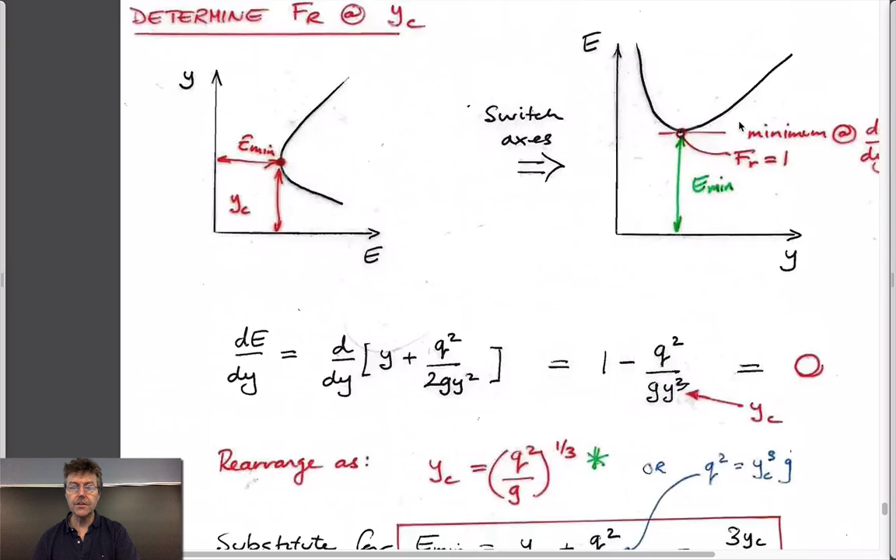And the other two coordinates on here, which I'll just quote, are that this is the critical depth, which by definition is just the depth at the nose, or the depth where the Froude number is equal to 1. This one here is where the Froude number is less than 1, and this one here is where the Froude number is greater than 1. So-called supercritical and subcritical - we'll go through this in more detail next time.

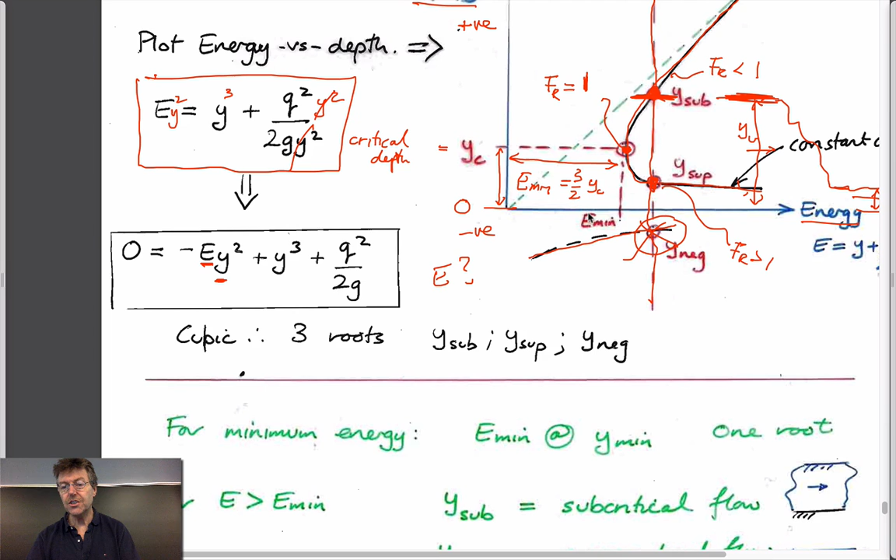The one parting shot I have is that this length here, the minimum energy, E min, is equal to something like - I can never remember - 3 over 2 yc. This is the critical depth, the depth of flow where the celerity wave velocity is exactly equal to the flow velocity. The magnitude of minimum energy at this particular point is equal to 3 over 2 yc. If you go down here, you can see how you do that - we just minimize this function. Not particularly important, but it is important to know what the ordinates of this are.

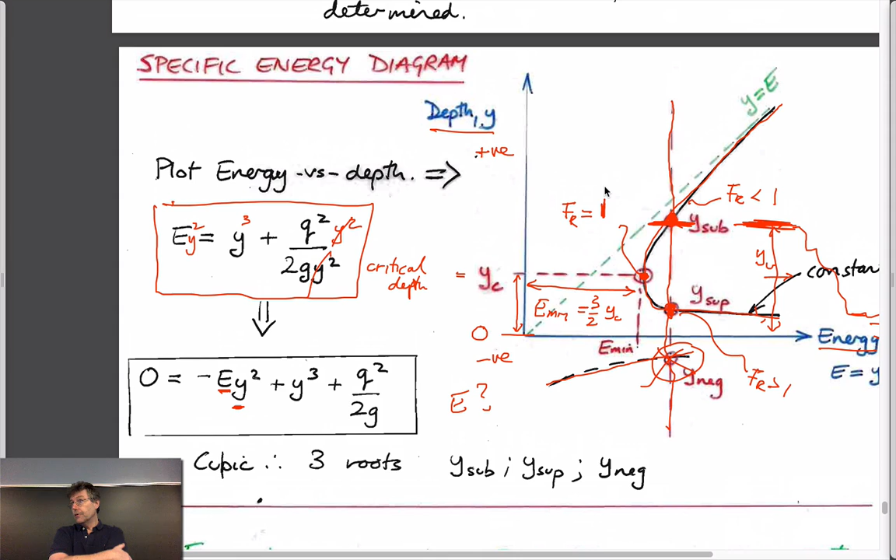We don't really have any time to do anything useful with that today, but next time in our parting shot on Monday, we'll finish this off and talk about how we use that to say something about flow configurations. Interesting stuff - I think it's interesting stuff. All right.